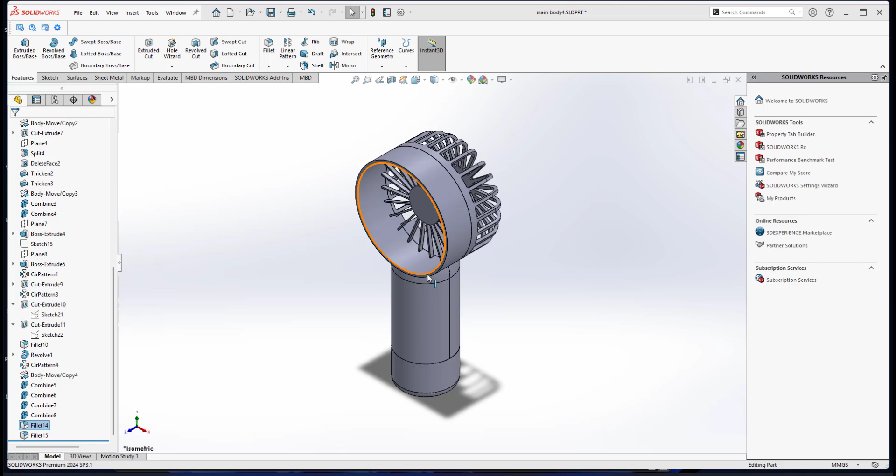Okay, in my previous video I've already shown you how I've done the detailing of the rear casing.

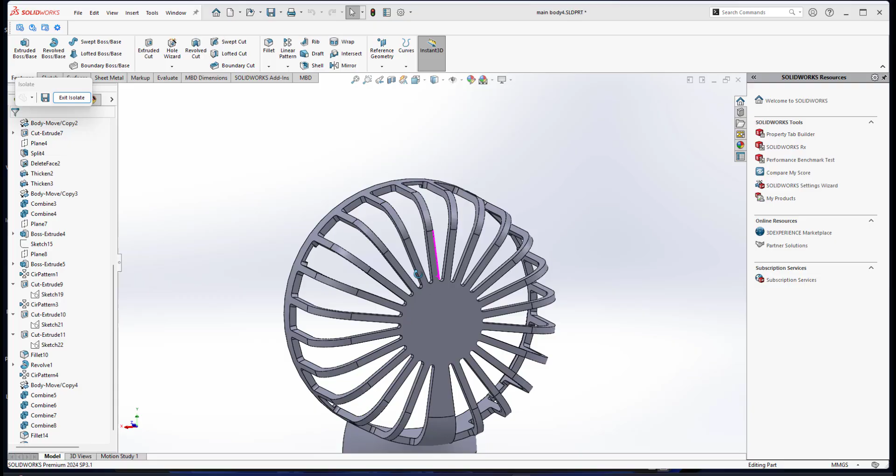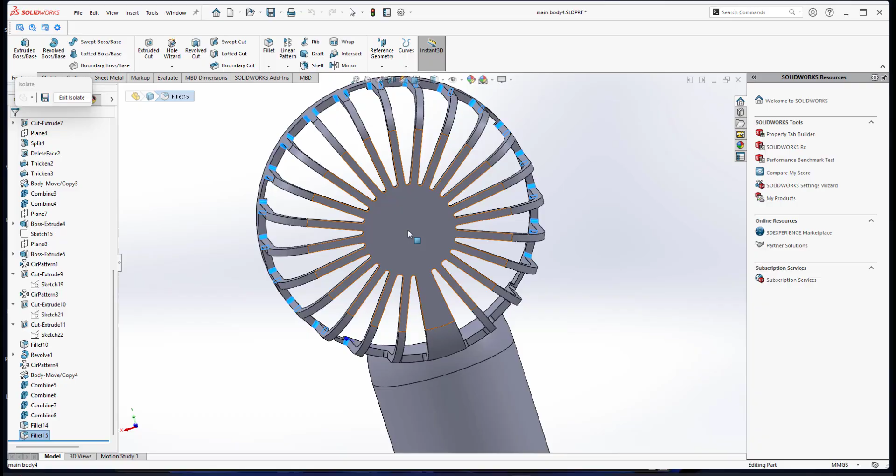Before I proceed in this video, I have already made some correction adjustments since I found out the thickness of the fan grill of the rear casing is too thin. In my previous video I made the thickness 1 millimeter, so I've adjusted it. Looking at the sketch, I offsetted 1 millimeter on both sides, meaning the total thickness of the fan grill is now 2 millimeter, because 1 millimeter was too thin. Also, I've done filleting on all the edges here - this one is 0.75 millimeter, and the fillet radius for the bottom one is 1 millimeter. So now I have this curve on all the edges.

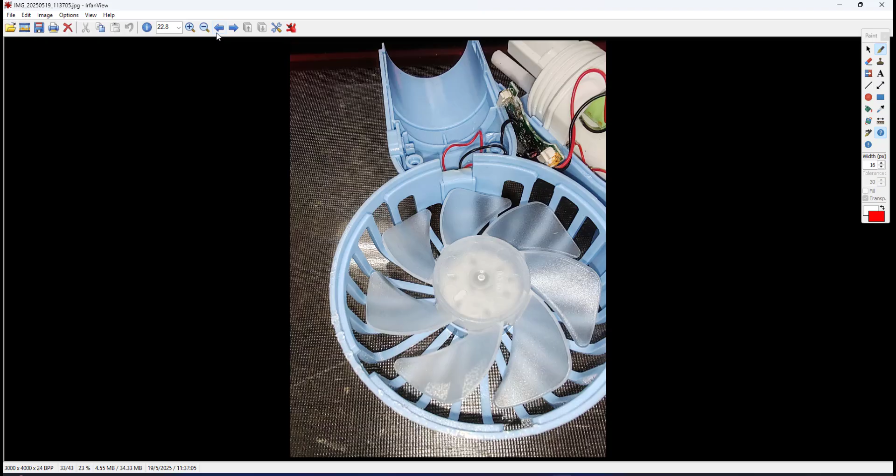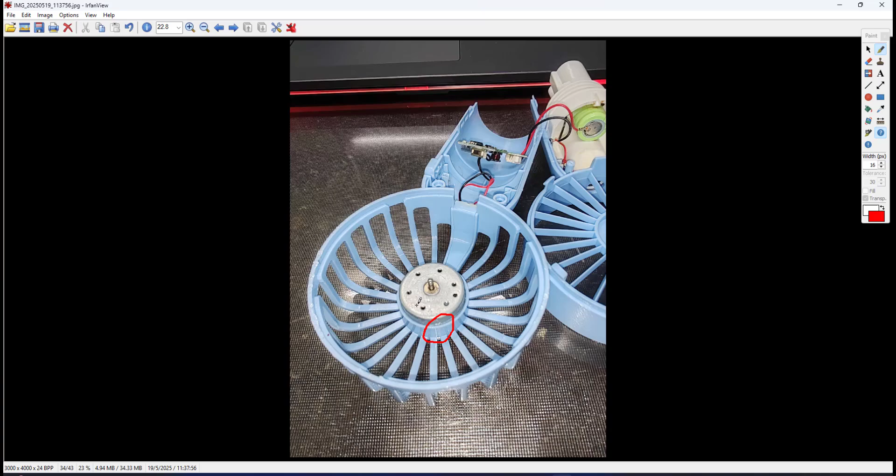Alright, so in this video I will do the continuation. If you look in this photo, let me go back to this view. So this is the rear casing. We have this protruded hollow cylinder - a hollow cylinder where we will mount the DC motor.

Actually I've done the DC motor modeling - this is my DC motor, modeled based on the exact size of my portable fan. Now in this video I will show you how I will do the casing on this rear casing where we will mount the motor.

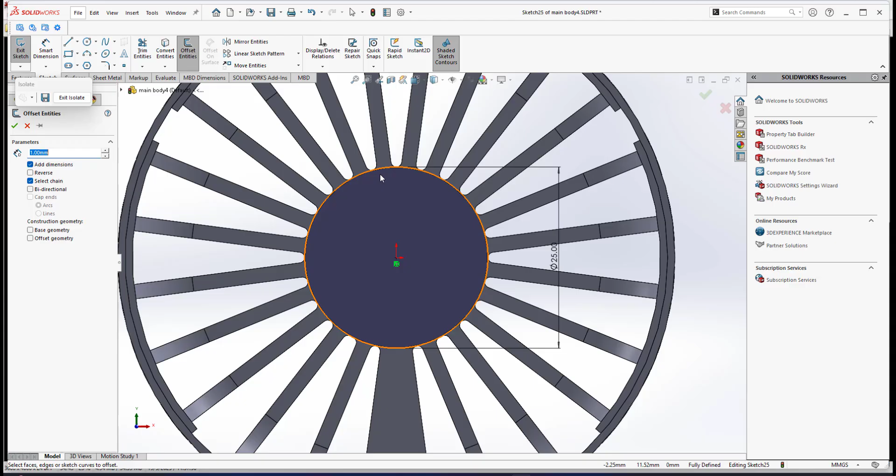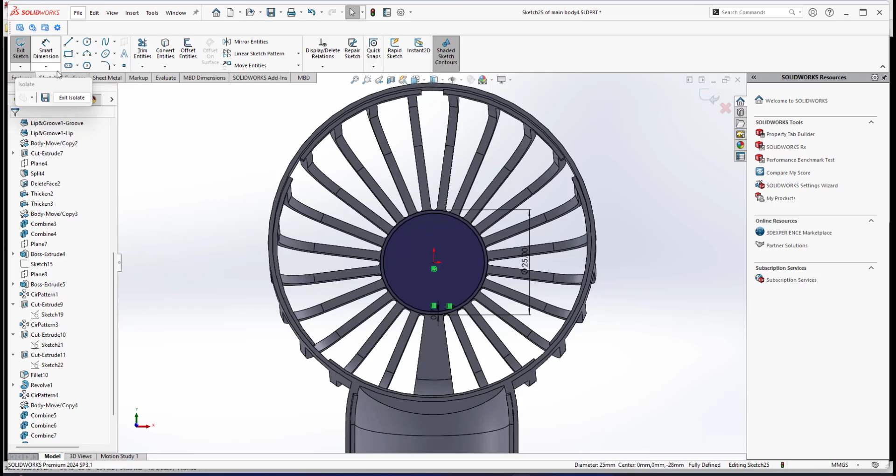Alright, so here I will do a sketch, since the diameter is 25 at this plane. So I will extrude - but before I extrude I will do a shell. I will do an offset of 0.75 thickness, since we have a thickness here of 0.75. I select this one, making sure it's not going outside, then reverse. This will be the profile for me to extrude by a distance of 8 millimeter.

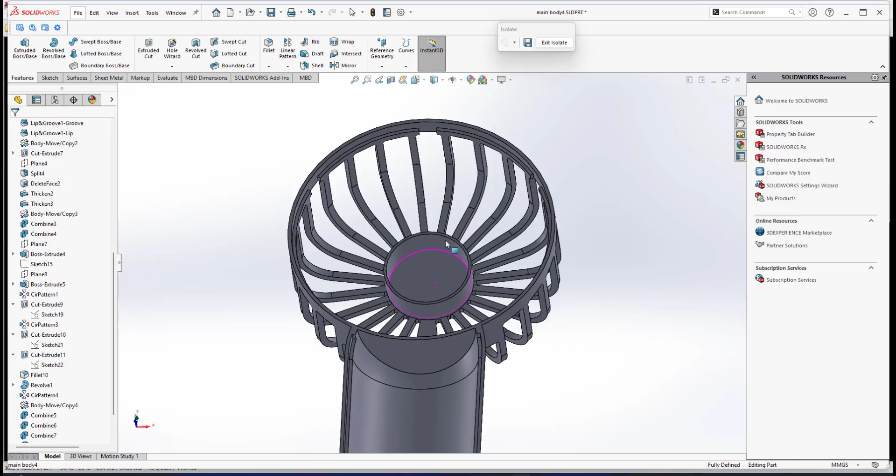So I have this thing where we will mount the DC motor into this location. Okay, another thing - let me show you another view of the rear casing. Hold on.

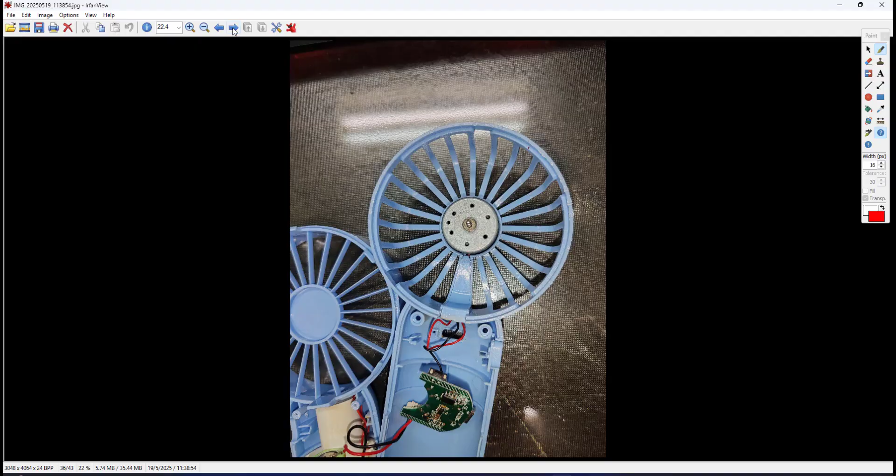Actually we have a cutout here, kind of like this - I'll show you the cutout later. But first I need to show you how we'll make this thing. We have kind of like a space here that will be a pathway for the cable to pass through, connected to the motor, with a channel for the cable to pass through.

Alright, to do this, if you look carefully at another photo - this thing, we need to make this, right? So we have kind of a tunnel, and also a thin cap that will enclose this tunnel. Okay, let me show you in SolidWorks how I will do this.

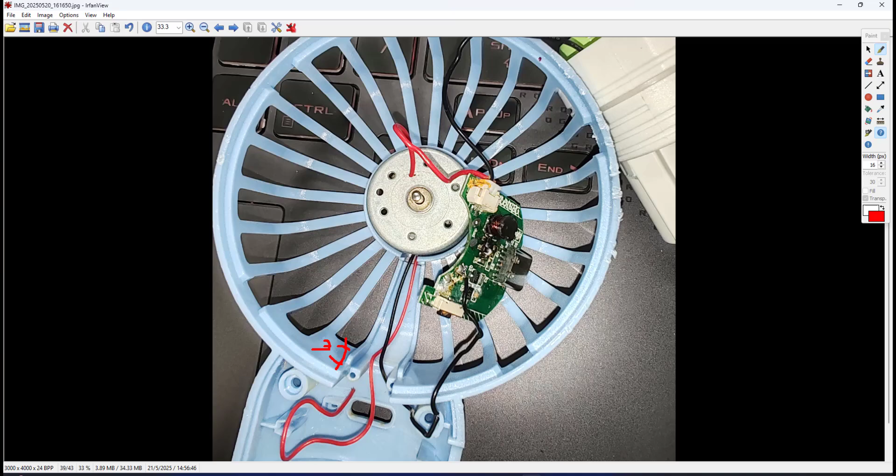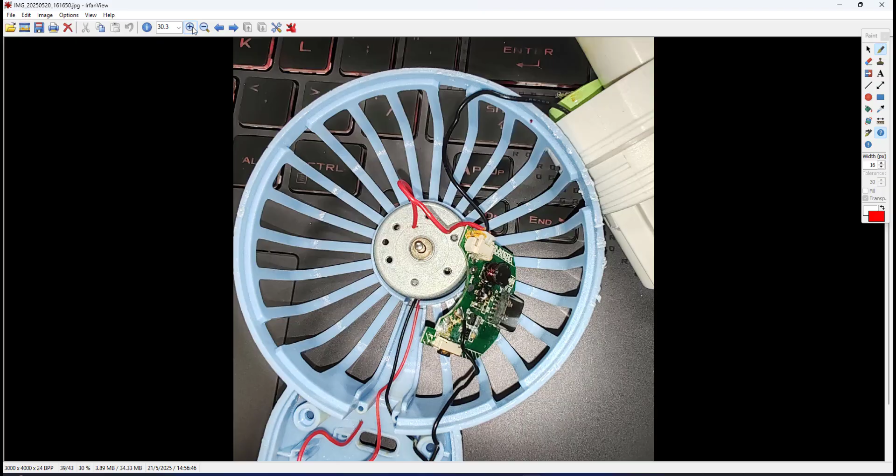In order for me to do this - here's another photo. Since in this photo I already removed the thin cap that encases this tunnel for the cable, if you look here we have a thin wall. The thickness I will go for is 0.5. So we have a thin wall, and the thin wall is kind of like higher than this surface, about 3 millimeter.

So in order for me to create this tunnel or channel, just watch my video how I will do this. There's a lot of ways, but I found the accurate way is to create kind of a split for this portion where I will create a tunnel for the cable.

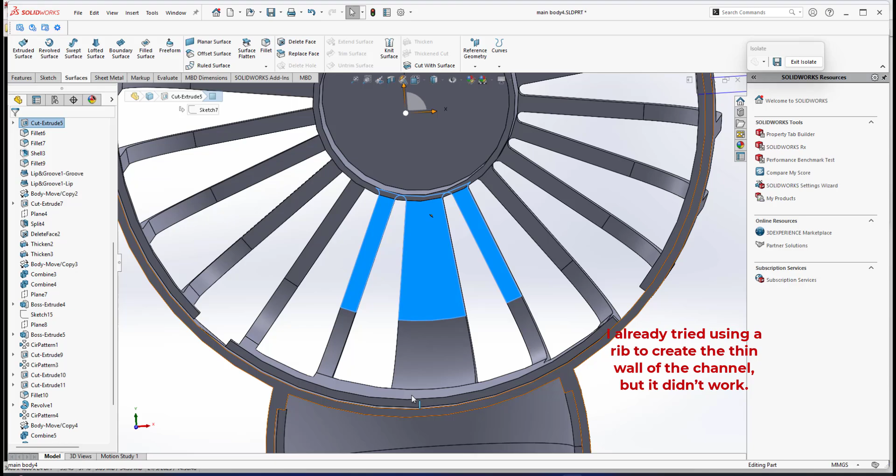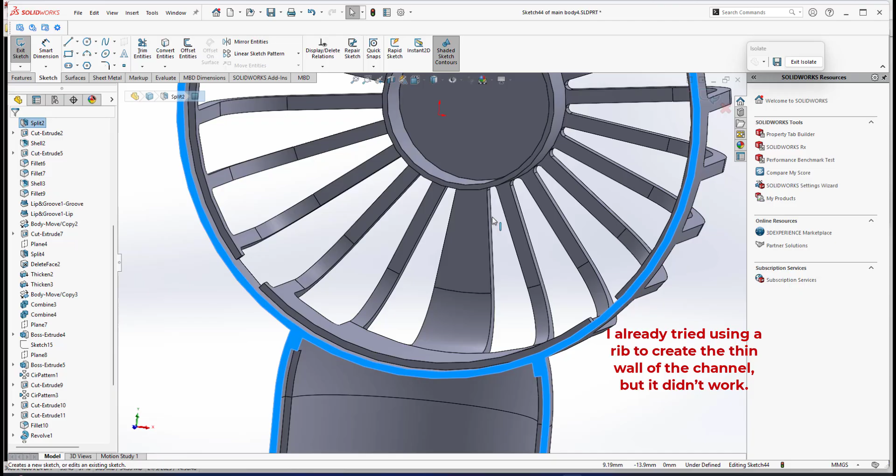My first move is that I will create a sketch at this surface, so I start at that surface. I will trace the outline of this edge, this portion. Let me go to the perpendicular view of my sketch plane. I'm now in sketch mode on this plane, so I will select this edge, this circular edge, and also the most outer circular edge, then Convert Entities. So now I have this trace curve there.

Okay, here this one I will drag up until it touches and coincides with the circular edge, and also here, and this one I will drag until it coincides with the edge, and this one as well.

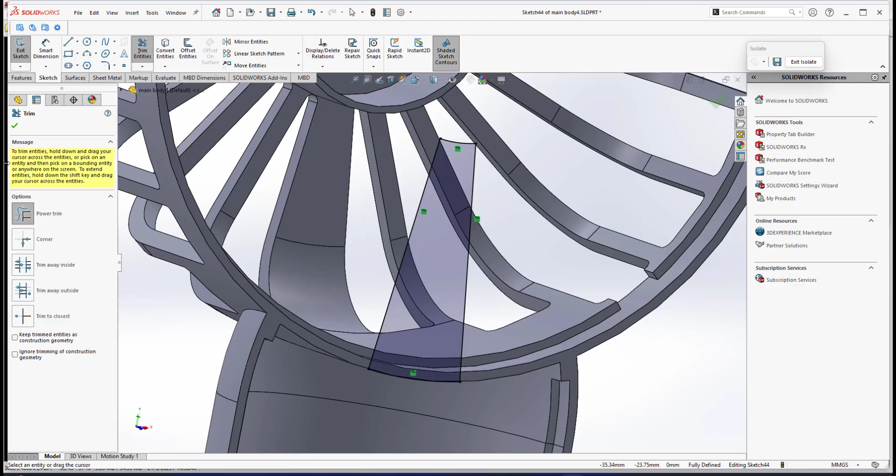Right, okay, now I will do trim. I only need this portion. This shaded area I'm not going to extrude. I just need this curve, so I exit the sketch.

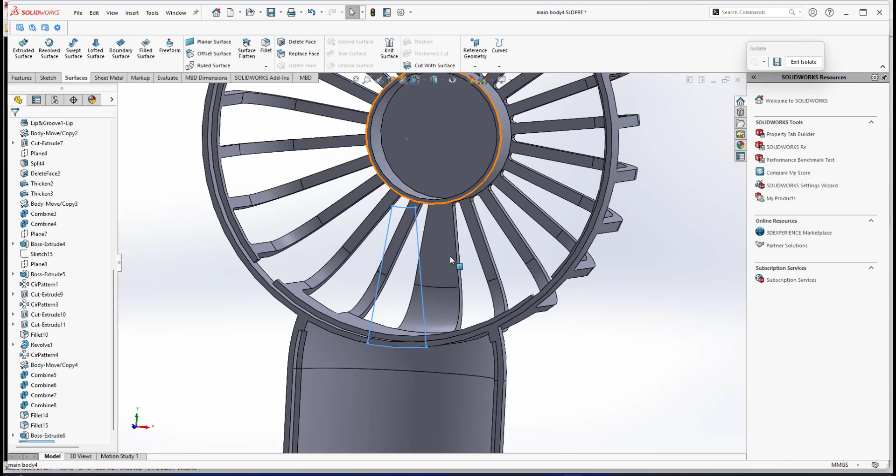So this curve, I need to do split, meaning this portion will be split by this curve. So the rear casing will be split by this curve, so I get the portion that I want. I will do insert features, then split.

The curve is already selected. Then I click at cut bodies. I select both, but I do not check consume cut. I uncheck consume cut, meaning I just want them to be split. So now I have two bodies.

Okay, if I exit isolate, if you look at the back, this rear casing is already split, so it becomes like this because I already split it by this curve.

And the one that I need to focus on doing the tunnel is this part. So this one is already a separate object, so I have this portion. This is the thing that I want to do the tunnel for the cable.

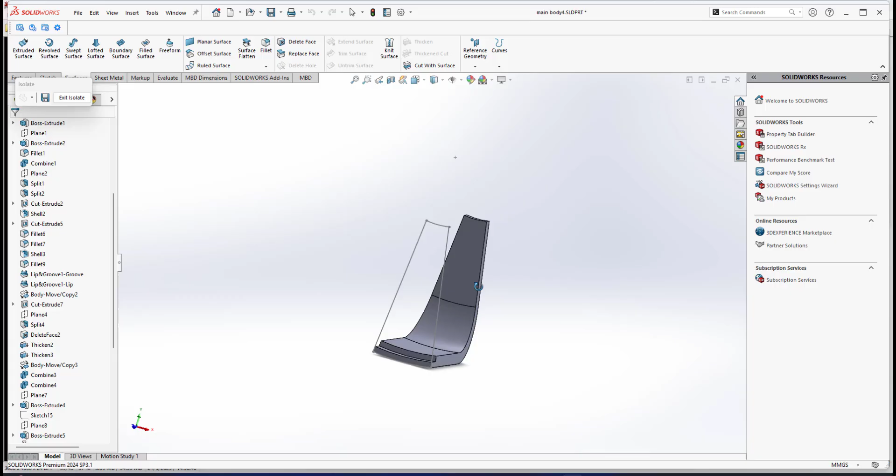Okay, just watch my video. The idea is, if I have this portion, now I can trace the outline where I can do a full revolve, since as I mentioned the thickness is 3.

This is 3 millimeter thickness. This is thicker than the rest of the surface here, since the rest of the surface doesn't have a thick wall, just a plain surface. So this rest surface is a little bit lower, but the tunnel is a little bit higher.

So what I want to do is revolve it, since the shape of this rear casing is a full circular revolution. So what I will do is trace the outline with a thicker cross section by 3 millimeter. The idea to do this is by using intersection curve.

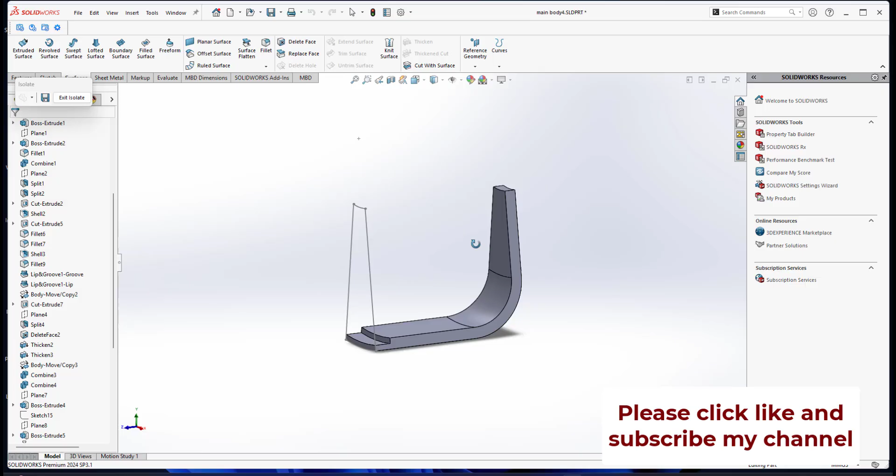Intersection curve. Okay, if you look carefully, intersection curve means - let me drag this way - I'm now in sketch mode. Intersection curve means under the tools here we have a sketch tool, and it is called intersection curve.

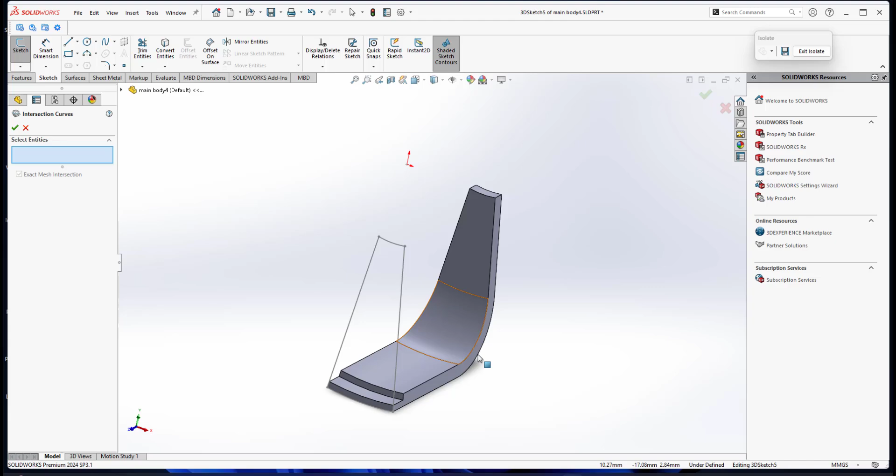Intersection curve means I will select these back faces, also the back faces and the bottom face. Whatever face that I selected, I also select the plane which is the right plane, since the right plane is laying in the middle. Whatever surface I already selected, these 3 surfaces, and the right plane, whatever the right plane cuts at that surface, it will create the intersection curve.

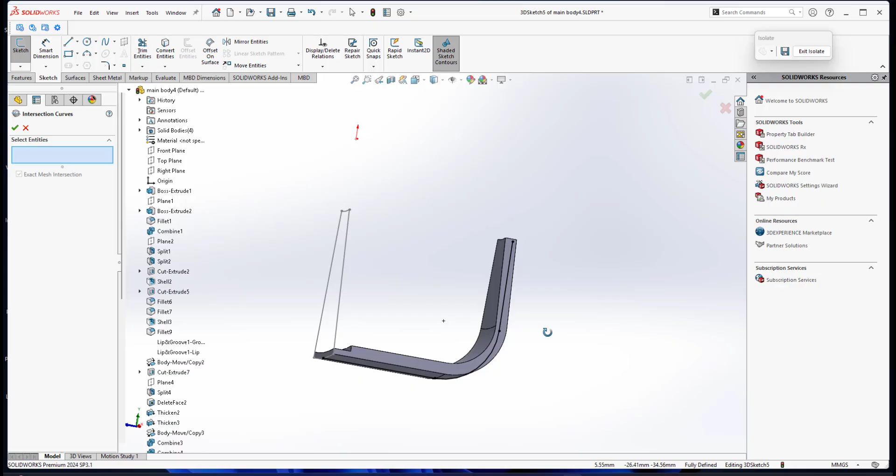Okay, if I click OK, as you can see here, we have a traced outline. So this is the intersection curve based on the bottom surface and the other 2 back surfaces, intersecting with the right plane. So this is what we have.

So let me click OK first. Now, if you look here in the feature manager, the last one, I have a 3D sketch. 3D sketch means this is not on a 2D plane. I need it to be on a 2D plane. So I will exit the sketch.

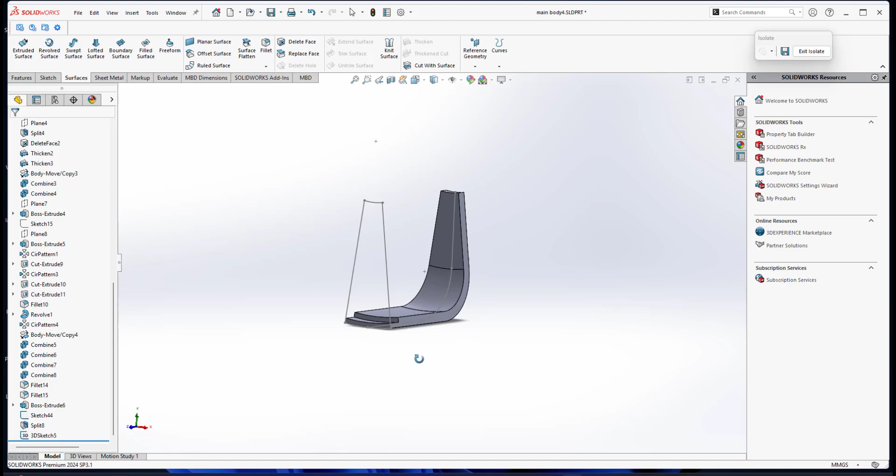For me to trace this outline in a 2D plane, I need to create another sketch on the right plane, since the right plane is in the middle. So on the right plane, I create a sketch.

So now if I scroll down here, I select the 3D sketch that I've just created, it's already highlighted, but now I'm under sketch 45. I'm on the sketch on the right plane.

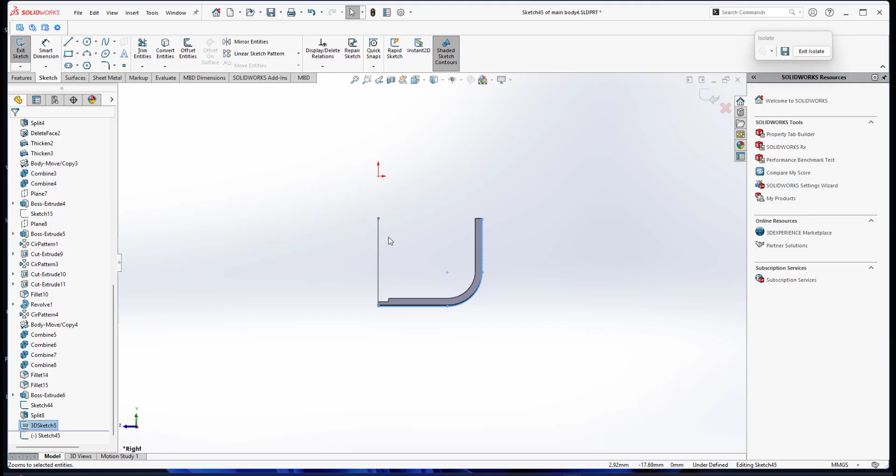So it means I already select the 3D sketch, then I convert to entities. It traces the outline of my 3D sketch that I did by intersection curve. So this 3D sketch, I can turn off. What I need is just the trace of that 3D sketch in the right plane, the new right plane. So this is the sketch that I need.

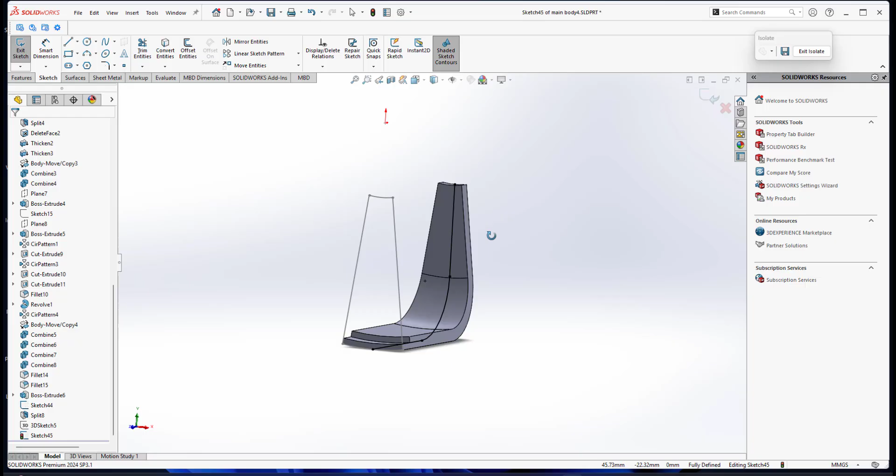So I go to the perpendicular view. So what I will do here, as you can see, I will offset this line. Okay, I will do offset.

Okay, since this thickness is 2 millimeter, I want to add another 3 millimeter to this side. So I will go for 5 millimeter.

And another thing, I must select - chain must be selected. If I select these edges, as you can see, it's jointed because I already clicked at cap ends. If cap end is not checked, we remain with a gap here. Okay, I check the cap ends and make sure it's not arc, it's line - meaning it joins the gap by lines, not by an arc, right?

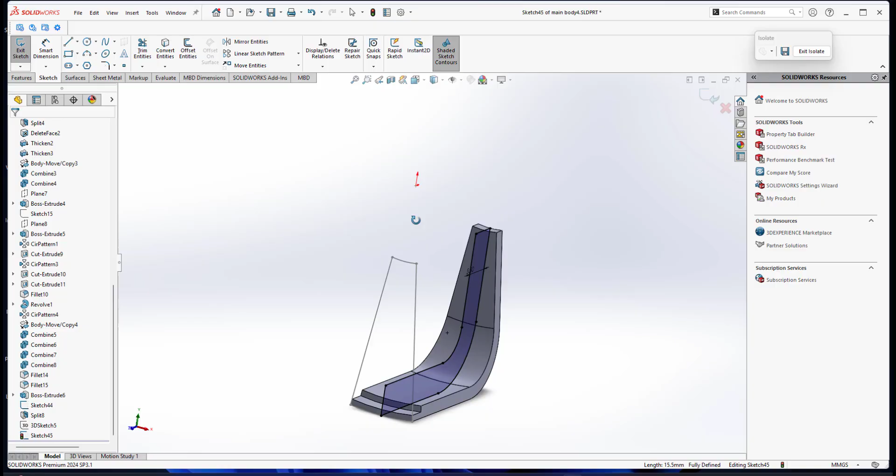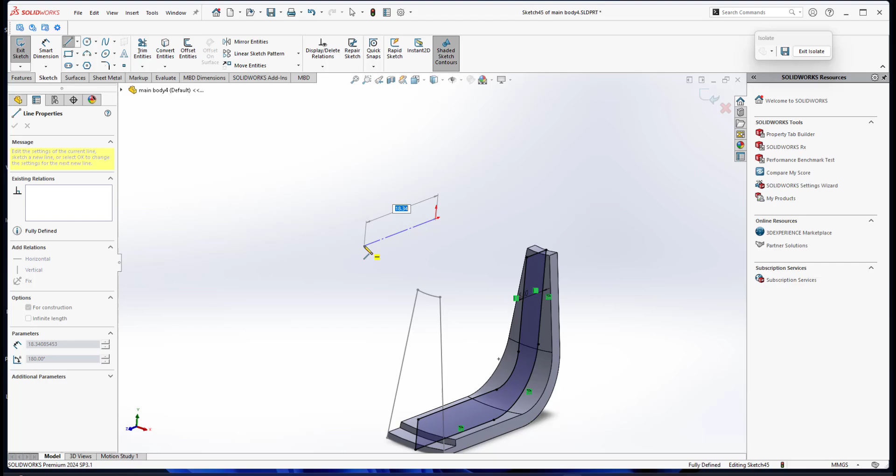So I have this outline, then I click OK. So this is an outline that I need to make a full revolution by doing revolve, right? But in order for me to do revolve, I need a center line. Since this is the center origin point of my right plane, I can create a center line here. So I need an axis, make sure that it goes vertical like this. Make sure this one is horizontal. It's horizontal, so this will be my axis of revolution.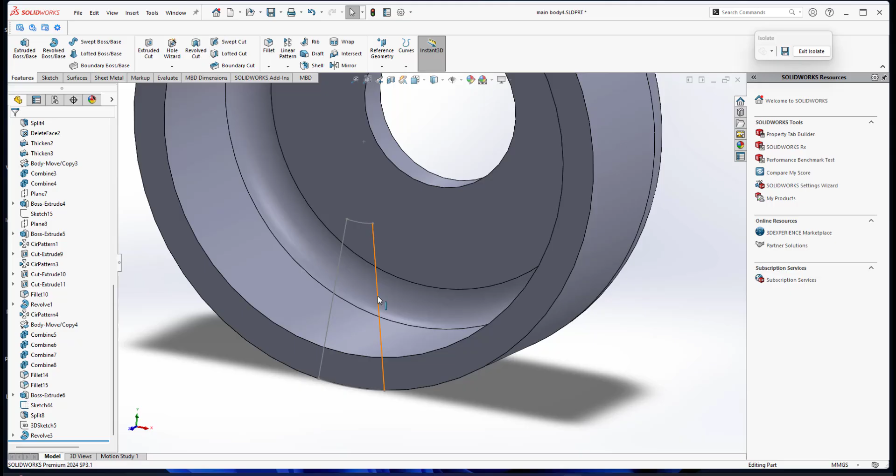Okay, I already have the cross section. This is my axis of revolution. If I go for features, revolve, by default is full circle. I just remade it as full circle. So I have this temporary full revolution of the cross section. But what I need to do now, I need to split this thing by the sketch that I have done earlier. This sketch, the outline of this thing, then I will do a split. So I only have the pie shape, the portion of it, right?

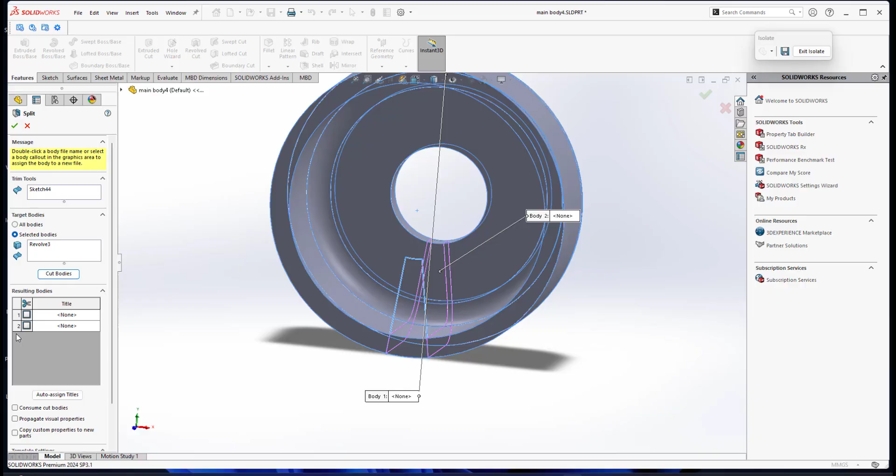So this thing I will split: insert features, split, then I will select this curve for me to split this object. So I click at cut bodies. What I will do, I select only the portion that I want to delete. So this one, make sure consume cut bodies is on. So what I have is this thing. This will be my base for me to create the tunnel of the cable, right? The tunnel of the cable. Let me save my file first. So this is the thing.

Alright, my next move is that since I already have this base component here for me to create the tunnel, what I will do next, I will duplicate this thing. There's a reason why, later I will explain to you. I will clone this base object here. So under insert features, I will do move copy and make sure copy is checked and number is 1. I select this one, then I simply click OK to make a clone version of this. Okay, I already have 2 versions of this.

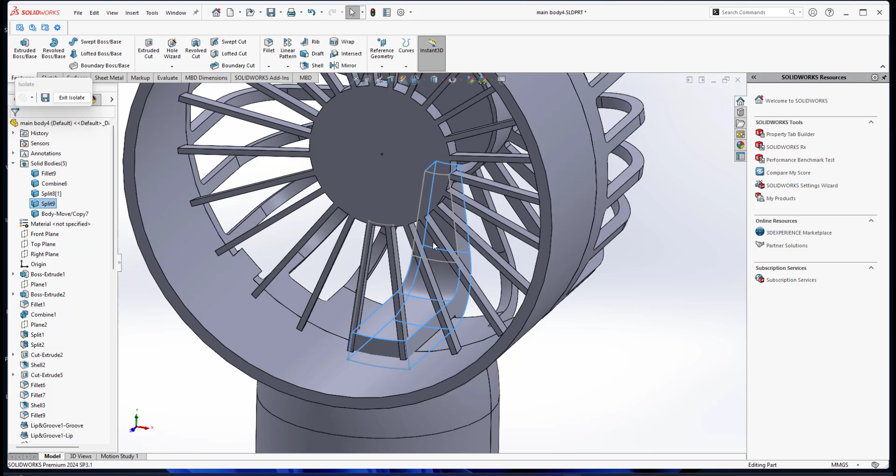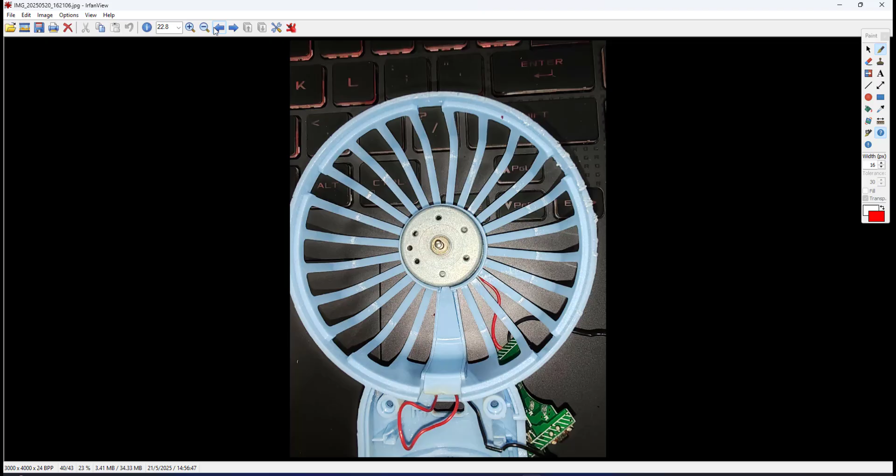If you look at the solid body, we have split 9 is the original base one. The body move copy is the clone version. Alright, let me exit isolate again. Let me focus on the first one, the split 9, the original base component here. For this one, as I mentioned to you, if you look in this photo, we have a wall. I will do a wall of maybe about 0.5 thickness, or maybe 0.75. I go for 0.75 thickness of the wall.

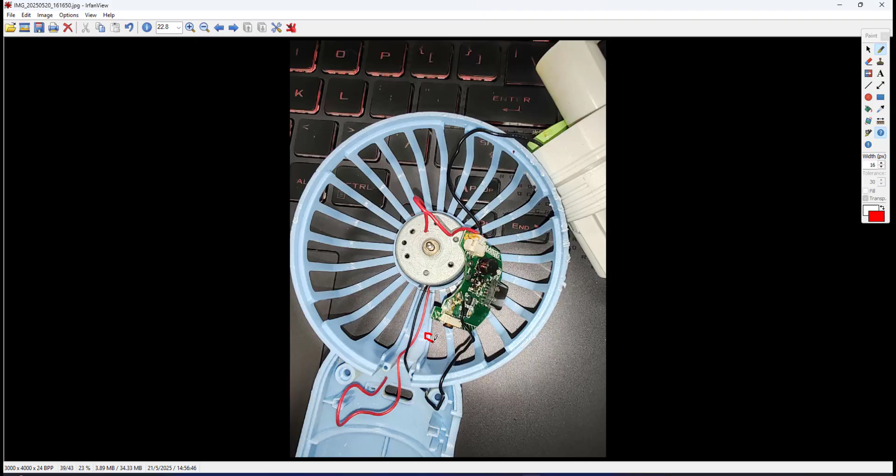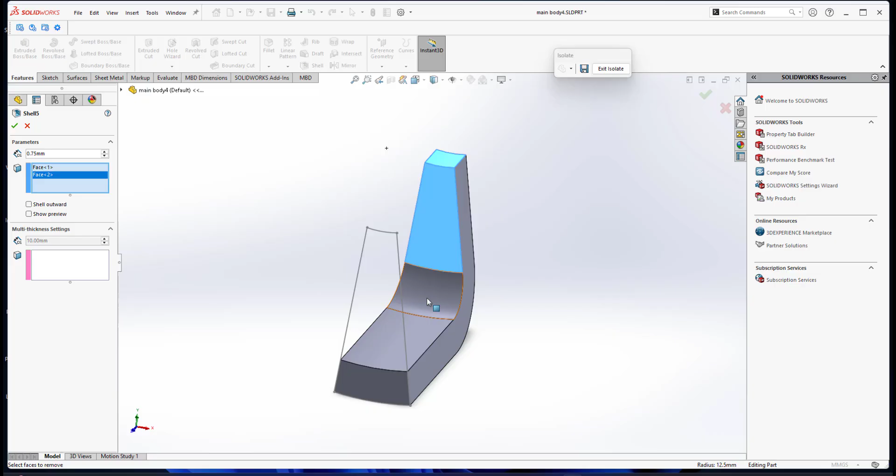In order for me to create the wall, since I have this base object here, I will do shell by the thickness of 0.75, and I will select this face, this face, this face, this face, and this face. I already gave 0.75, then I click OK. So I have a tunnel shape, right? A tunnel shape for the cable.

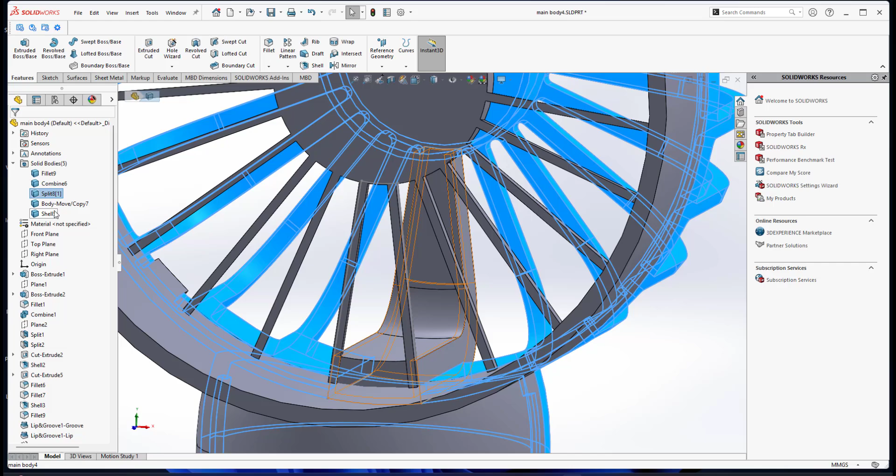If I exit isolate, if you look here, if I select the rear casing and the shell, I isolate it. As you can see, we have a tunnel for the cable, but these are still two separate objects, still not joined, not merged into one. Later I will do combine to merge this as one body.

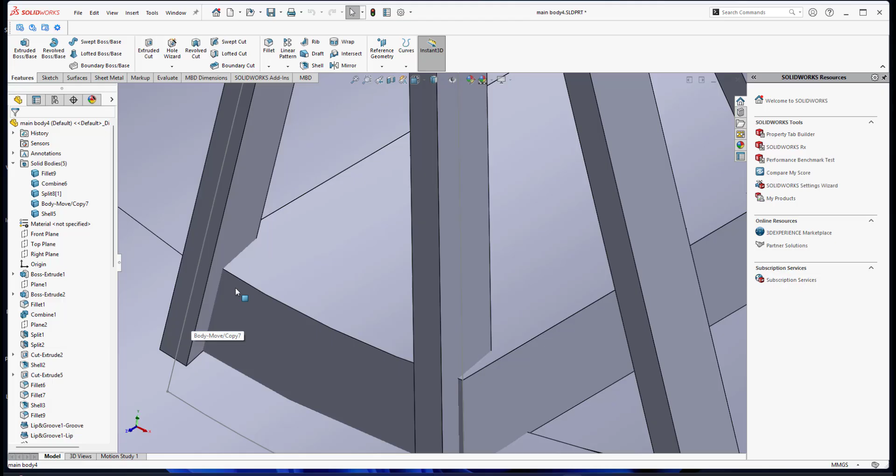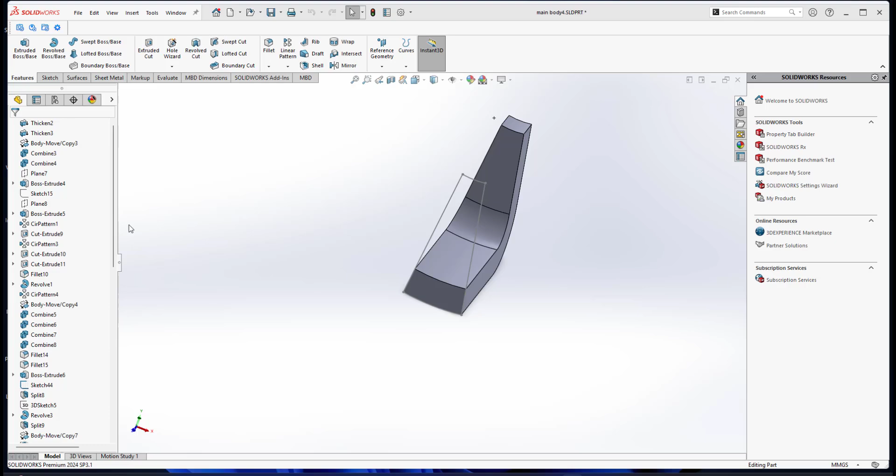But before that, if you look here, I think the tunnel is too long, I need to cut it a little bit. If I exit isolate again, let me show you. The tunnel is extended, it cuts through the parts of this front casing fan grill. So I need to make the tunnel a little bit shorter. Alright, so I will isolate the tunnel. Not this one, my mistake, not this object. The tunnel, which is the shell here, I will isolate.

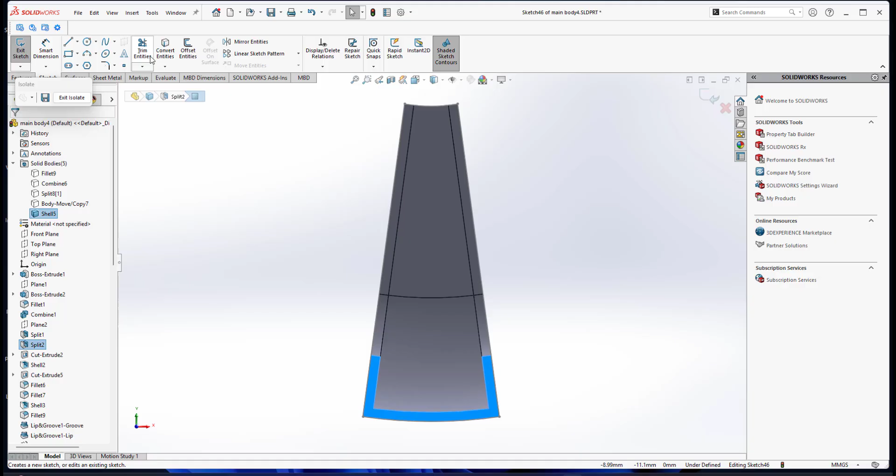Alright, I will cut this, make it shorter. In order for me to do that, I have a flat plane here. So I already select the face. This one I will convert to entities, so I have a traced outline there. Then I will do features, extruded cut. The direction is this direction.

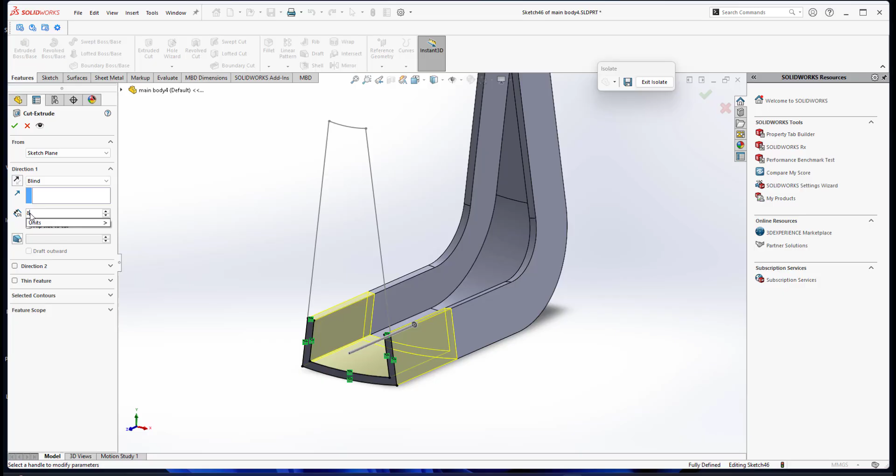Let me try, I think it's about 10 millimeters. Let me go for 10. I have to check how far the distance is. If I go for 10, or maybe I can go for 8 millimeters. So I make it shorter. So I have this thing, and if I exit my isolate, and if I select this one and the rear casing and isolate it, I have a shorter tunnel.

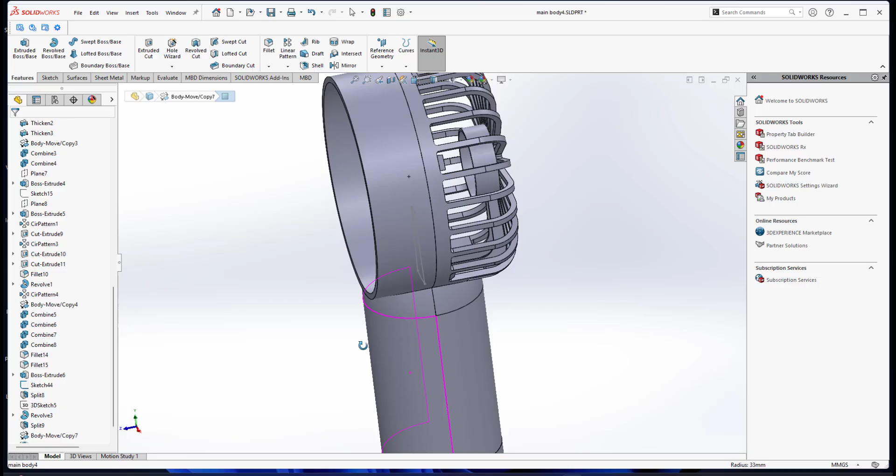If I exit isolate, just need to check, but this one I turned off for a while, this base object. So I have a tunnel, and if you look, we have some space where the cable will pass through, and the cable will flow inside this hollow shape of the handle. Where we have some component there, the cable will be joined to the battery unit. This is what I want to show you: how I will create the tunnel.

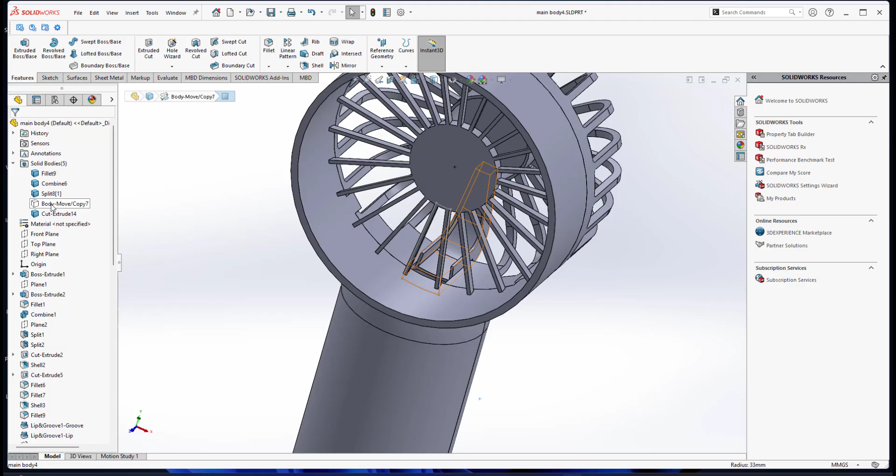Another thing, as mentioned to you just now, I turned off one of the copied versions of the tunnel. I turn this one back on. About this object, I will isolate. Let me go for this object and also the tunnel. I isolate it. So I have a duplicate version merged together with the tunnel.

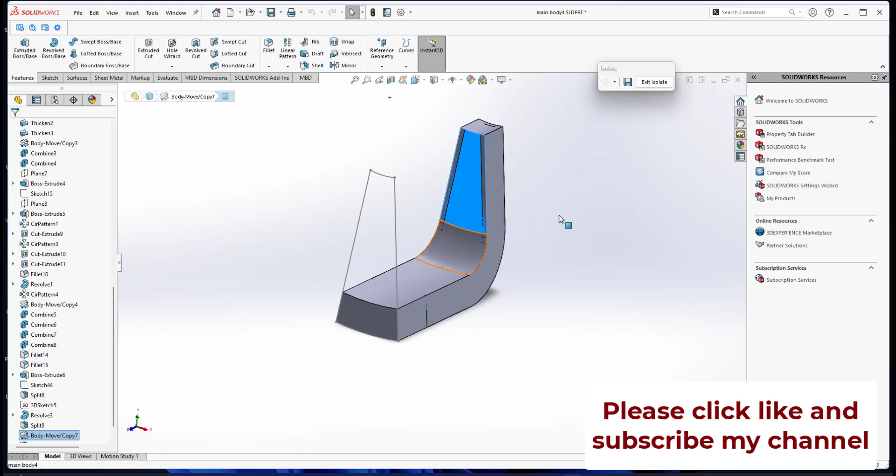So with this duplicated version, I will create what we call a cap that will enclose the tunnel, since the tunnel still doesn't have the cap. This clone version I will use as a base to create the enclosed cap to close the tunnel. Okay, let me exit isolate again.

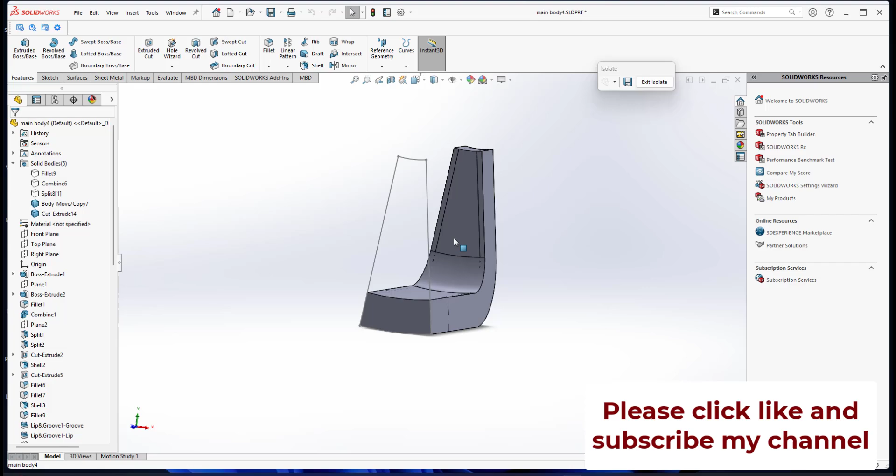To do that, I select the base component, the clone version of the tunnel. To create the cap, I will select this face and this face. I right click, selection tool, invert selection, so all the inverted selection faces I need to delete. I delete that face and click OK. So I have three thin joined surfaces.

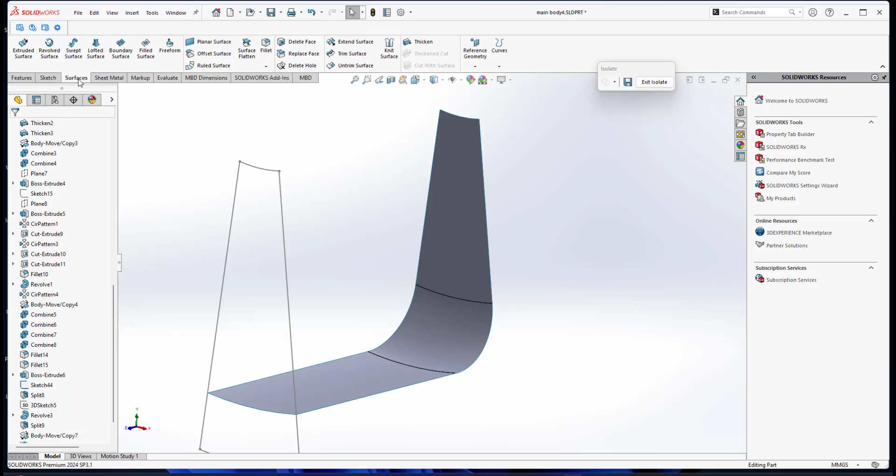These three surfaces, I will thicken. Since I'm now playing with surfaces, I'm in the surface tab and I can go for thicken. Thicken means I want to add a little bit of thickness in this direction. One is too big, I think; I go for 0.75, it's kind of thin.

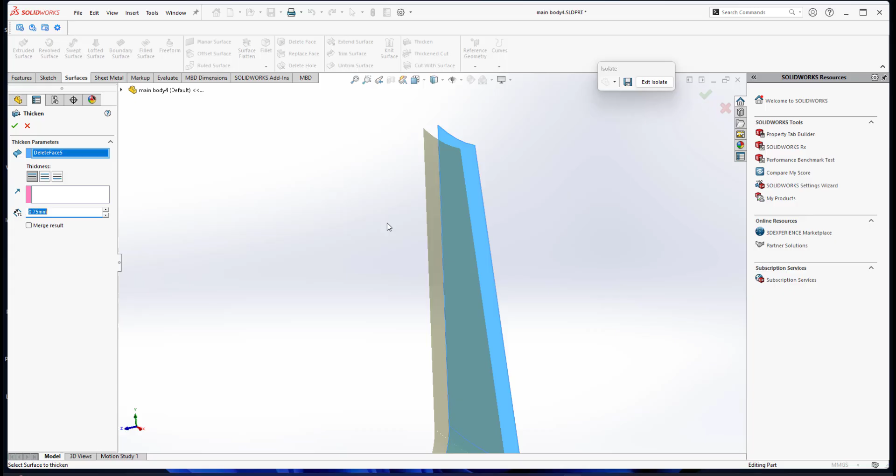If I select this, it goes in the direction that I want. If you go for the third option, it goes in that direction, but I want it in this direction because I want to create it as a cap for the tunnel. We already have the preview, so I make it 0.75, then click OK. Now I have a cap. If I isolate, as you can see, we have a cap for the tunnel.

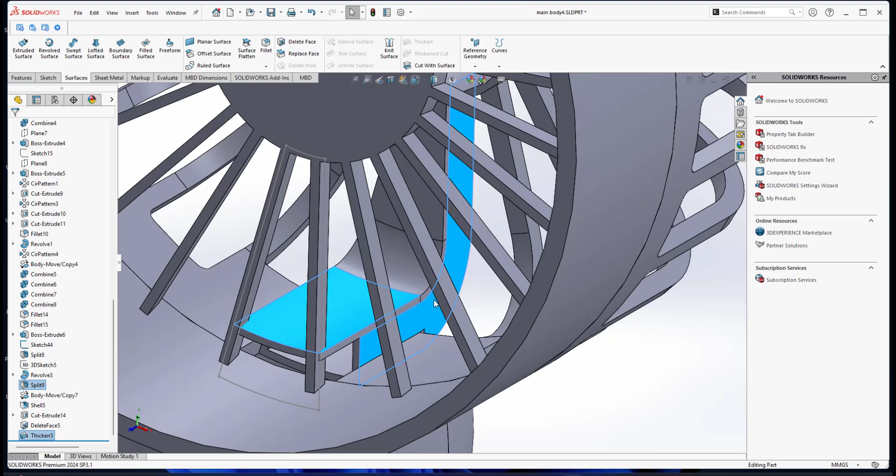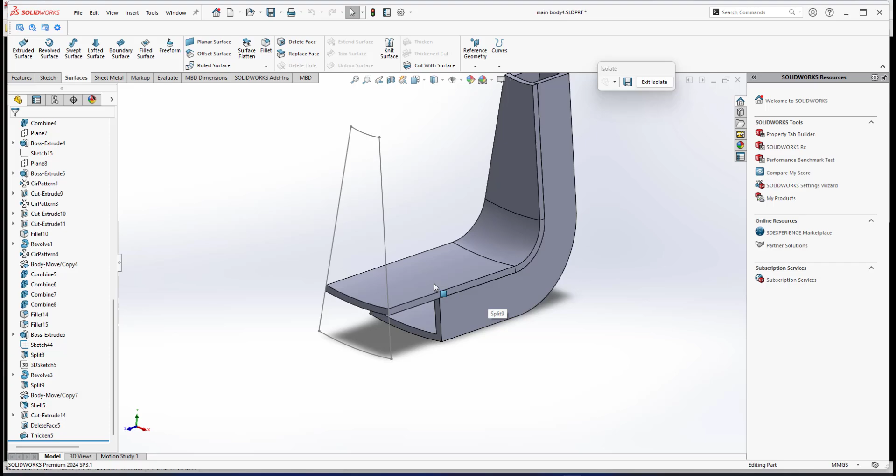This one is too long. If I exit isolate, the cap is too long. I need to make it shorter because it's already extended and cuts through the features of the front casing. To make it shorter, I will isolate this cap.

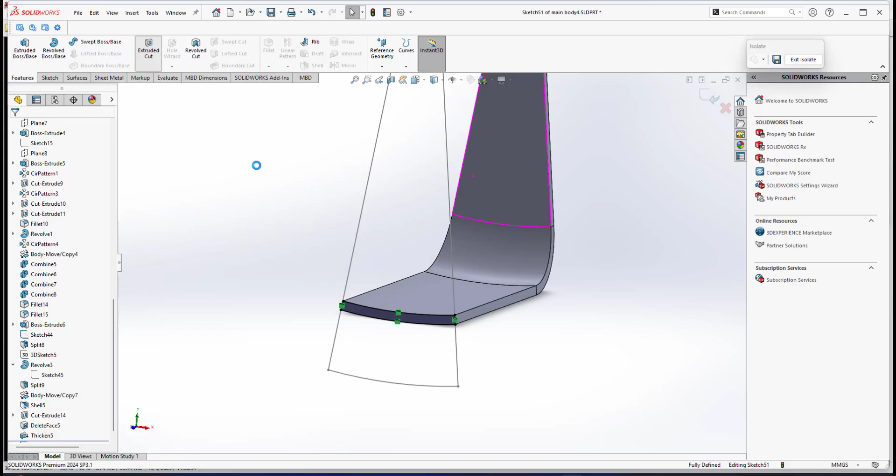Since I have a flat plane here, I can create a sketch on that plane and convert entities, so it will trace the outline. Now I will do an extruded cut by a distance of 3 mm to that side. So now the cap is a little bit shorter.

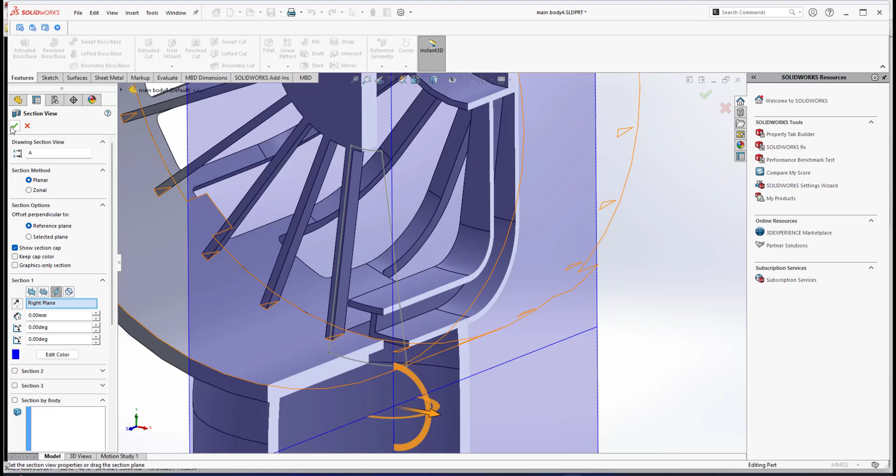If I exit isolate, as you can see, it's shorter. If I go for section right view, as you can see here, now the cap is a little bit shorter.

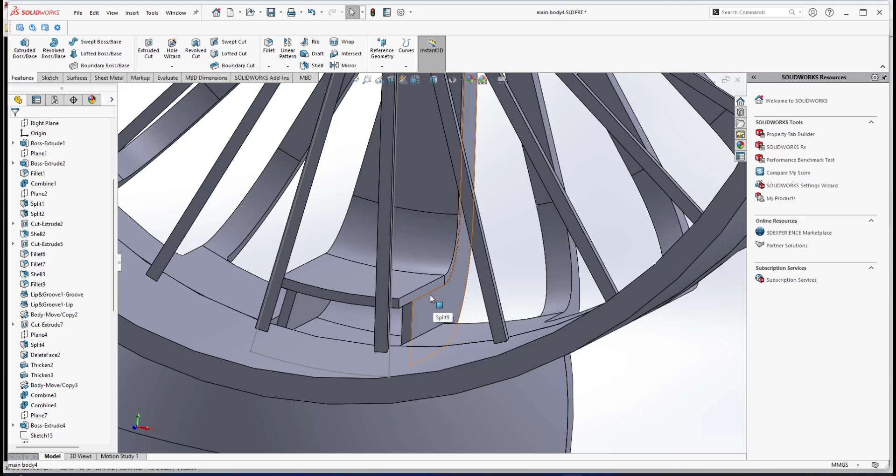Okay, another thing that I found out is, I think the height of this wall, remember earlier I made this wall 3 mm from this surface. I think it's too much, too high. I think I will edit it to make it a little bit lower, not 3 mm, since I made an offset profile here of 5 mm.

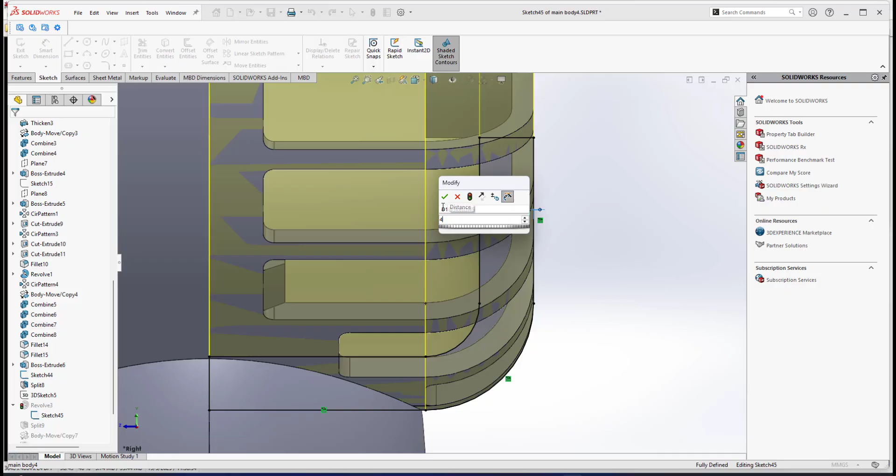So in order for me to do that, if you look here up until where I've done the revolve, based on the profile that I made an offset of 5. Okay, if I go for 4, I make the wall not too high, a little bit lower. Now I think everything is okay, and since it is fully parametric and everything is attached, it's much better. It looks a little bit lower, right?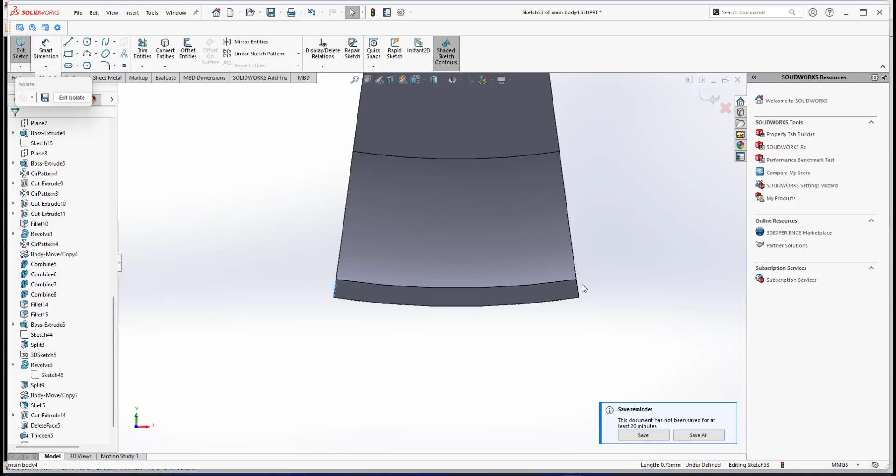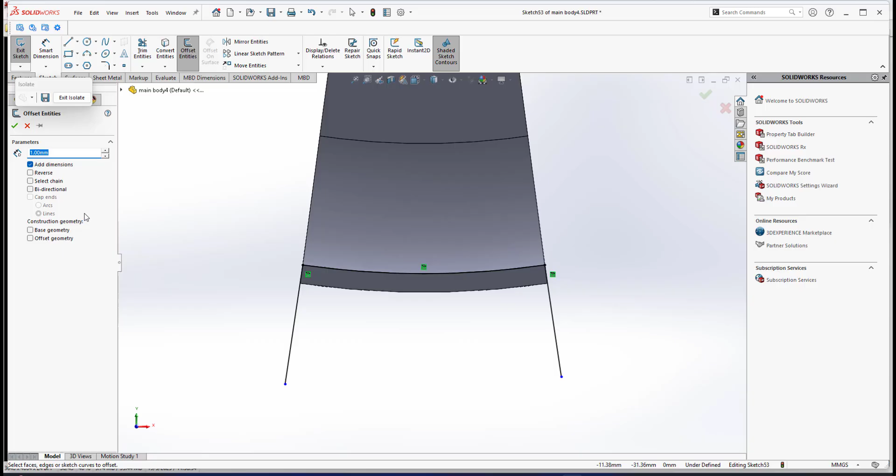I will trace the outline of this one, and hold my control key. This edge I will convert to entities, and also this outline I convert to entities, and this one I can drag a little bit longer. Right, so this line I will offset by 4 mm, so it goes to that side. Make sure you uncheck the selection. This is a basic offset. So it means from here to here is about 4 mm.

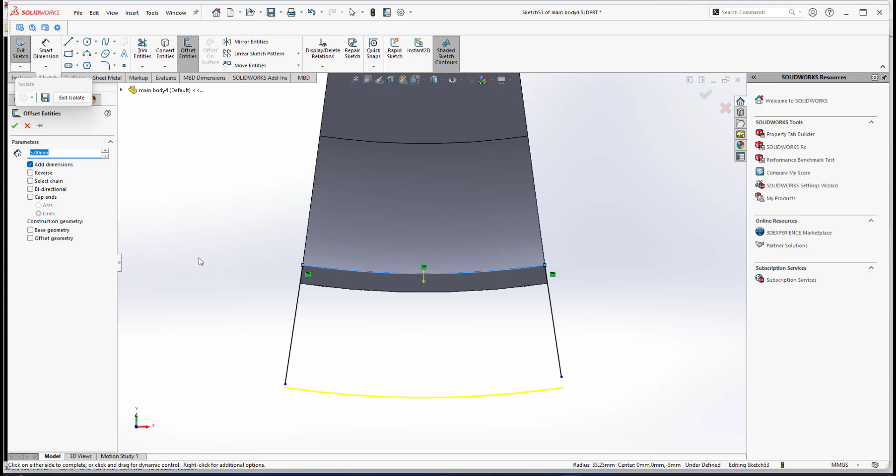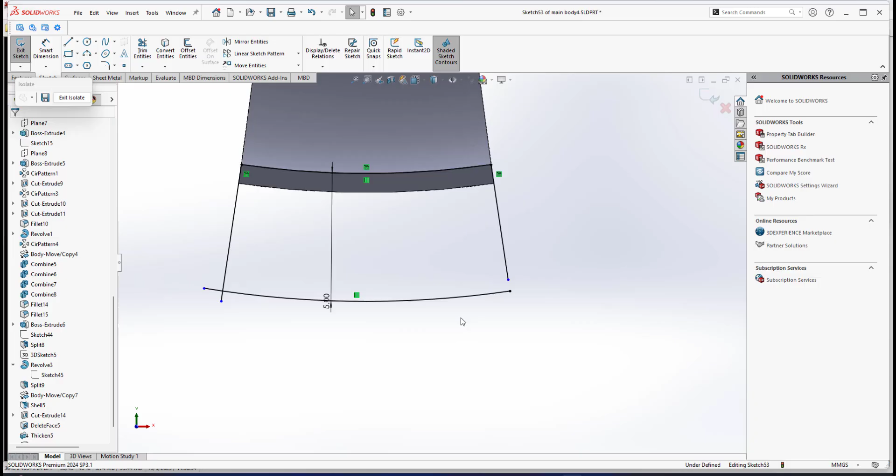If I go for 5, let's go for 5 mm. So I have an offset version. Now this one, I can simply drag it like this. I don't have to make this fully defined because this is just a quick demo. It's okay, sometimes your sketch is not fully defined. Let me try. This one I can drag like this. Right, so I have this thing. I don't want to trim it, just to quickly show you.

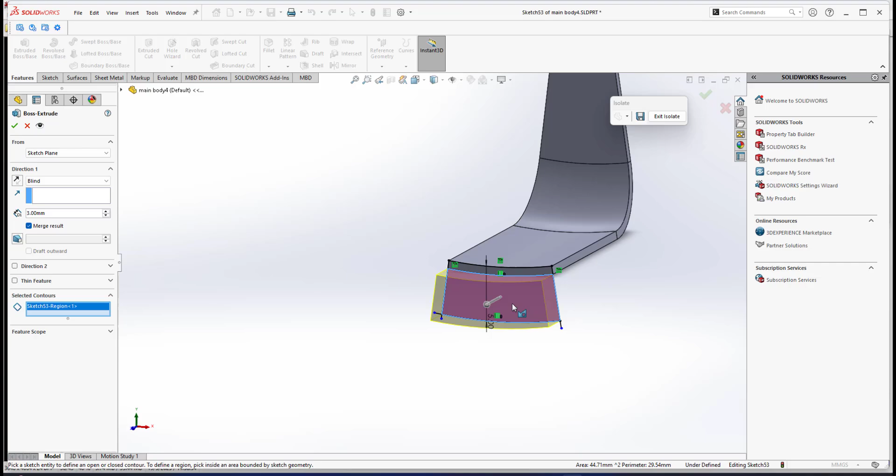I can just do extrude, select region. If you look at the contours, I will use these contours. Why does it go like this? Because the thin feature is on, so uncheck the thin feature. So I go for contours, the direction is not that direction, it goes to this direction, and the thickness is 0.75, so it goes thinner. Make sure merge result is on, so it will be merged as one object. So I have the shoulder.

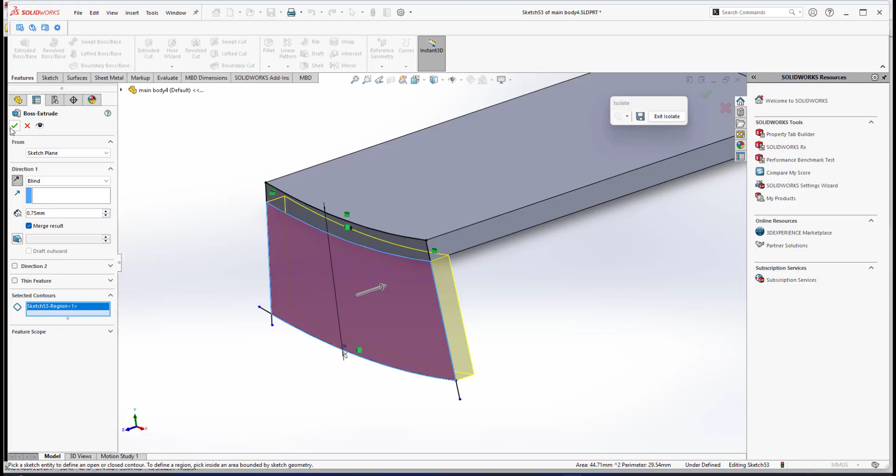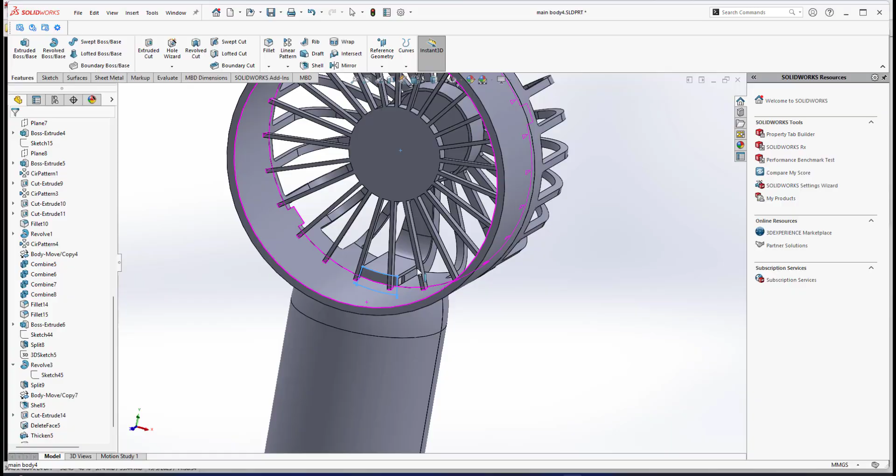If I exit isolate, now it kind of fills the opening, right? It encloses the opening. Before this we had an opening here. I think this one will be okay, and everything is quite good for the features to make way for the cable, right? Let me save my file again.

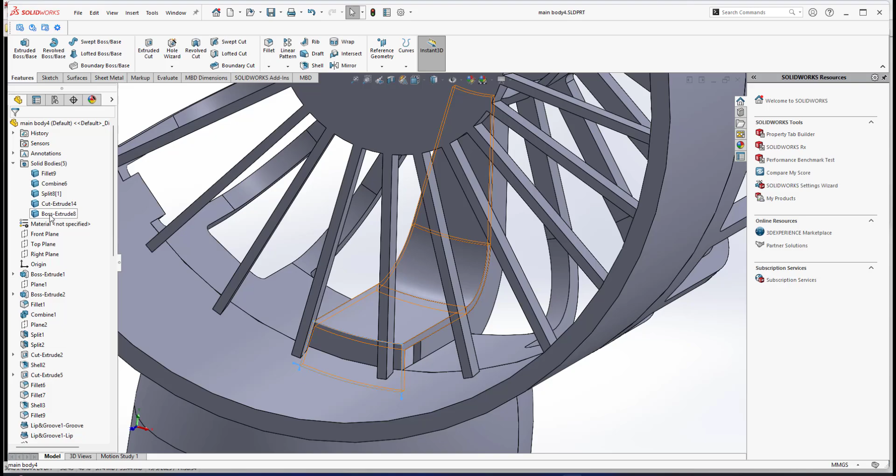The last thing to do in this video is that I still have not joined this. If you look at the solid bodies, the cap, the tunnel and the rack casing are still separate bodies. I need to merge them as one. So I will go to insert, features, combine, and add the rack casing and the tunnel. Then I click OK, and now it's already one body. The tunnel and the rack casing are merged into one. If I exit, we have the cap.

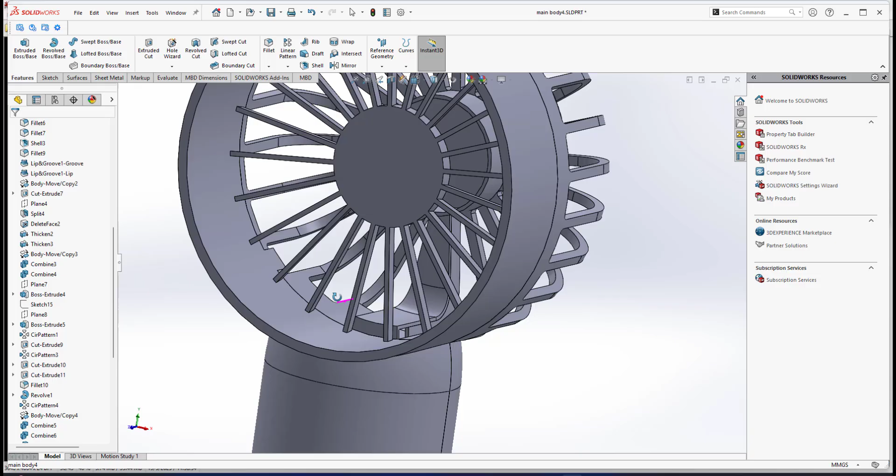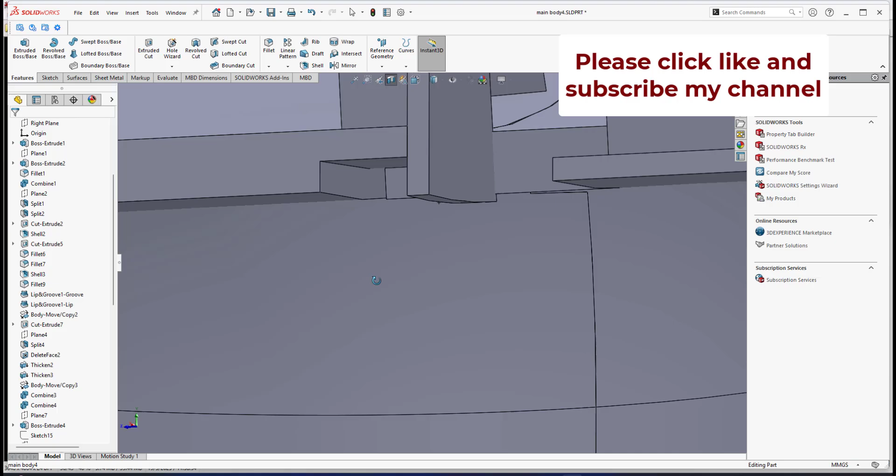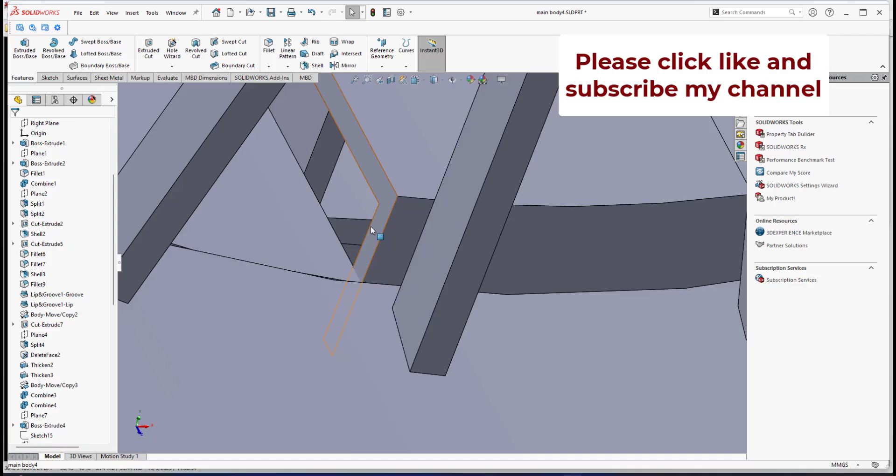Just to show you this section view again, we have something like this, right? I think this one is okay, a little bit cut through. Later in my next video I will do some editing to trim it, because this one is kind of diverging, flowing in that direction. I can make it a straight segment, but not in this video. This video only shows you how I do these features, but I can show you a few adjustments. It means we have intersected it a bit, right?

Alright, that's all for this video, because I think the video is taking too long.